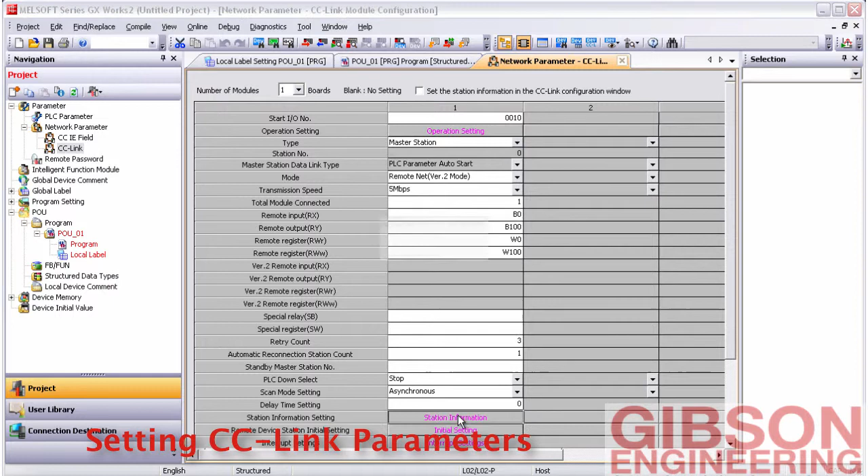Station information is the next thing you need to set. We do not, so where we chose one module over here, it only shows one. If we had chosen multiples, you'd see multiple here. So it shows module 1 and then station 1. If we had 2, it would show module 2, station 2.

However, we're going to go and choose remote device station. We're going to say it occupies 2 stations, which is 64 points. So now, once you do that, if you did have 2 or more axes, you'd see it skip a station number. So for module 1, it'd be station 1. Module 2 would be station 3. Module 3 would be station 5, etc.

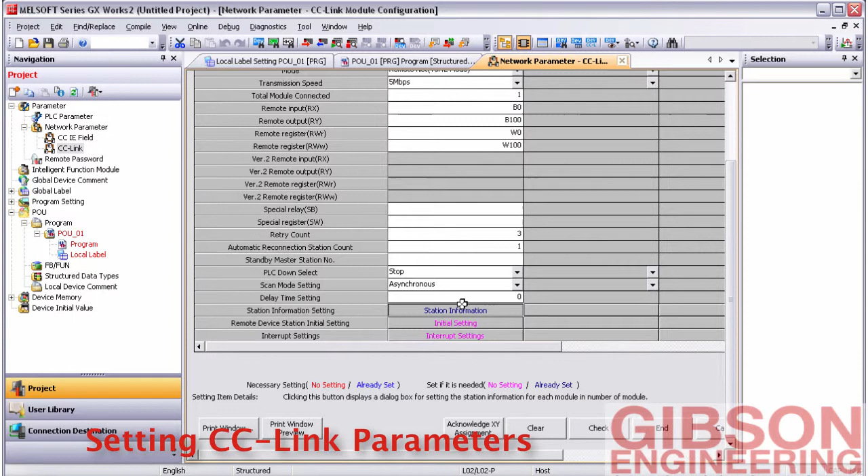Now this is all we need to set here, but make sure you click End. And again, on these CC-Link parameters, you want to hit End. So that's the communication setup.

Next, what we're going to do is import a library. So Gibson Engineering has developed a library which includes a function block and the corresponding labels specifically for the L series to talk to a PCON type controller.

So we're going to go to our user library. See, we've got nothing in there yet. We're going to install it. I'm going to browse for it on our local PC. It goes right to the folder I have it in, and choose that CC-Link PCON library. Hit OK, let's install the library, and now you see the library in our user library tab.

Everything's grayed out now, so what we do is we right click, we hit open, now you can see everything. Labels, any functions or function blocks you have, and any structured data types that were set up as well.

Now we do need to bring over our label data. So we're going to take Axis and Logic, highlight them, copy, and we're going to go back to our project, go to our global labels, paste it right in.

Now, our project can't share the same data names as our library. So we're going to change this to Axis 1. Logic, we can just change to logic bit, because that, you'll see later, can be used for multiple axes. Hit OK. So now we've got Axis 1 and logic bit under our global label data. This global 1, which was in there by default, we can get rid of it if we want and delete that.

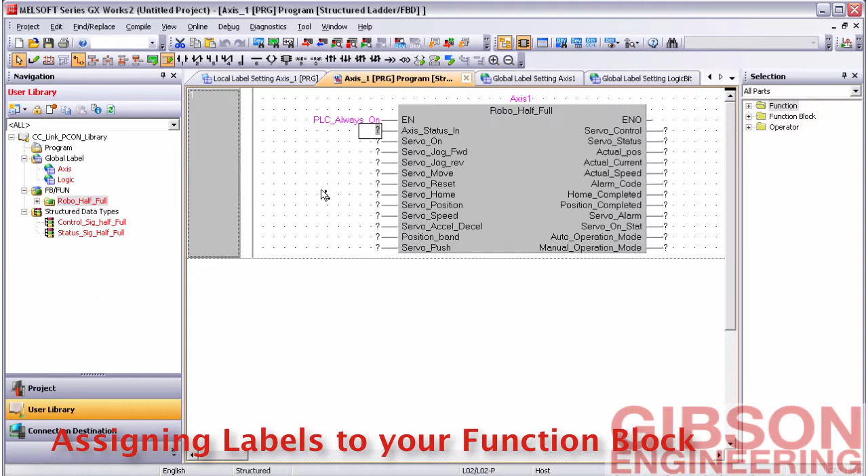So now the next one is axis status in. This is not in the logic bits, this is in axis 1, and it is a structured data type. So I'm going to choose axis 1 status, hit apply.

Now we just got to go down the list. We're back to simple data types, and this is just servo on, call it axis 1 on. Jog forward, reverse, start move, reset input, assign the home.

Servo position, and you can see this looks a little different. It knows based on the function block that we need a double word here, so we've got our position label. Servo speed, accel, decel. Again, it knows the data type, so it's only going to show the ones that are relevant.

Position band. Now in this library I happen to know we're going to choose position band, but I happen to know that it's set as a constant, and the servo push was not actually defined. Go back and look at our labels. There's no push in there, and you can see again position band was set as a constant.

So again, if I go back to our program, servo push we don't need to use, so I'm going to cut that question mark right out. Now on the output side, we're not going to create any additional programs other than just using this function block or any additional programming. So we don't necessarily need labels assigned to all these, but we can leave question marks.

The control one we do need to assign that structured data type. Double click on that, command, apply. Now the rest of these I can just go ahead and get rid of. You could assign labels — there are labels defined in that library — and that's all we need.

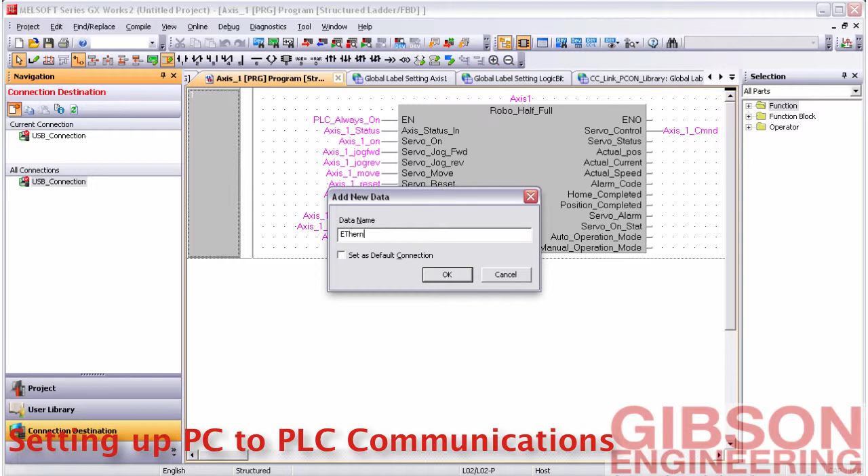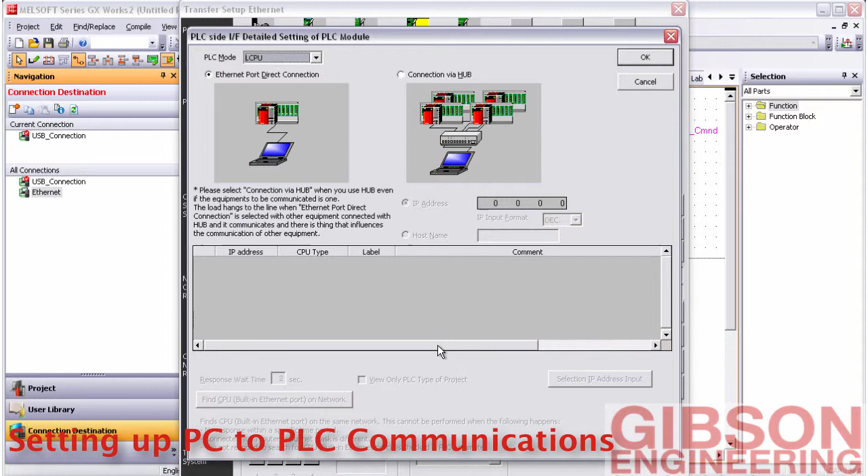If I want to add a new connection, say I want this to be my Ethernet. Hit OK, double click on that to set it up, and I can do the same thing. I don't have a hub, so I'm going to do PLC direct coupled connection Ethernet. Hit yes. Now if I look at my settings, nothing there — PLC module, you can see Ethernet port direct connection. So if you had a hub, you could check this box and assign the IP address, or find the CPU's IP address and use it. Do a connection test now — successfully connected. So you can see we can jump back and forth between connections. Current connection is USB; I can drag Ethernet up there and connect with that, or go back to USB.

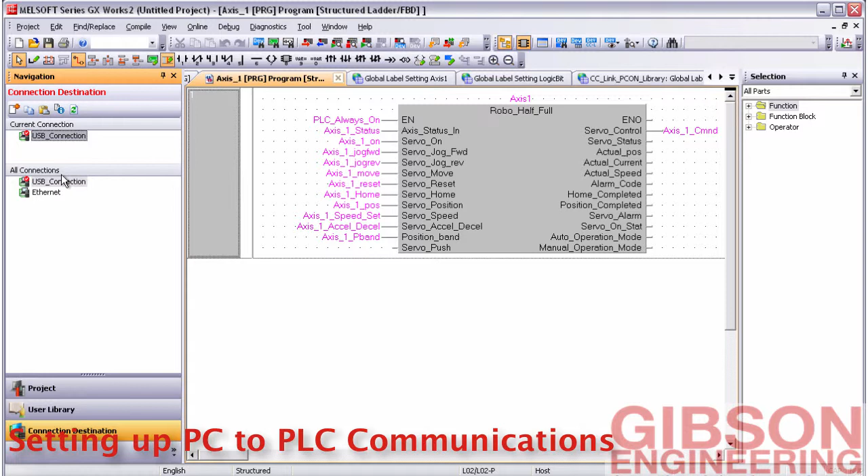Now that those are set up, we can download a program. First what we want to do is rebuild all. Yes, no errors. Online, write to the PLC. One thing to point out here: in our case the symbolic information isn't particularly big, but symbolic information can get to be a memory hog, so it's good practice to turn that to standard ROM — PLC data can go into the program memory.

Now I'm just going to download parameters and programs. Execute. Yes. I can overwrite the parameters. Check this button so it closes when it's done, do a remote run, and it's all complete. Close this window. So now I can go online and start monitoring.

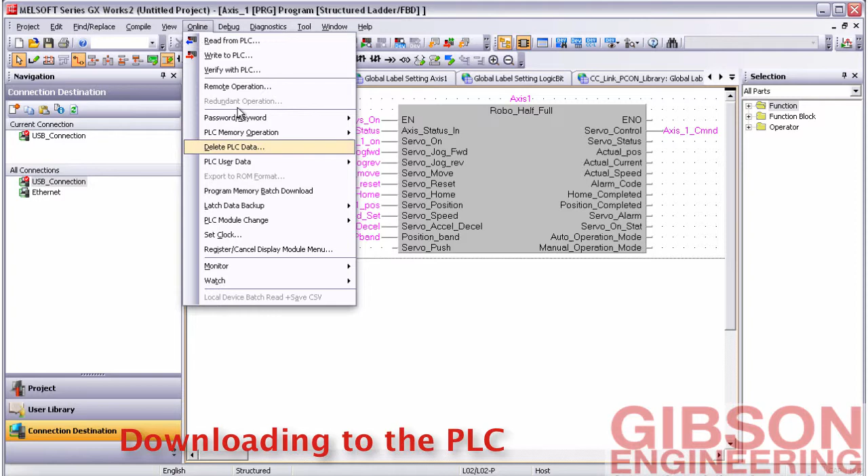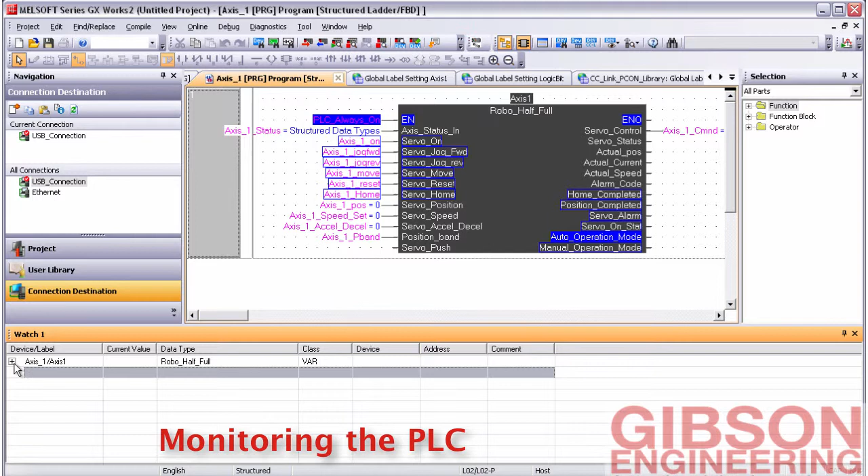You can see I'm now monitoring, so the always-on bit is on, nothing else is set yet. Another way to see that is I can create a watch window. A nice feature is I can right click right on this function block and register to watch. It now creates a watch list for this function block, which includes everything connected to it. See, there's just dots, not being watched yet. If I go online, watch, start watching, go back and look — they've all been populated.

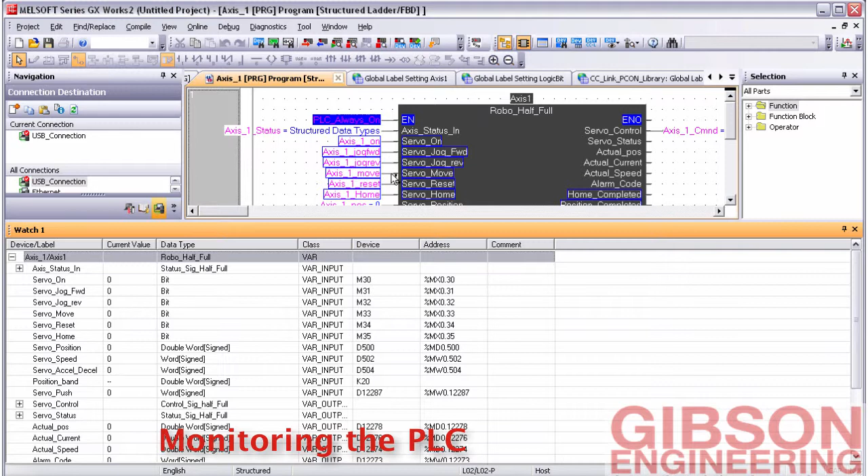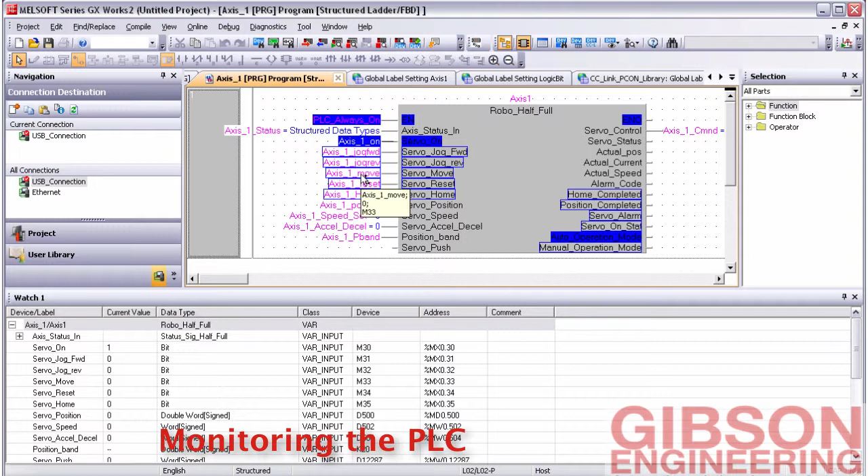So now if I go ahead and look at the function block, double click on servo on, say turn it on — it's turned on now, you can see the bit there. Our servo is on; we could start turning bits to jog, home, start a move if we had put in a position. But we've also created a soft GOT program that we can use as user input.

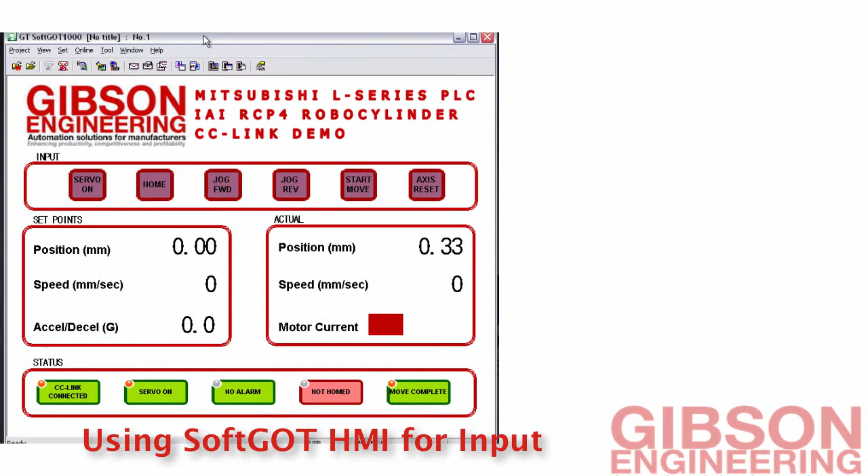So now we've got our soft GOT. You can see our servo is already on because we had turned that on through the PLC software. Now we can home it, we can jog, we can also go in and set positions — 100 millimeters, set a speed of 200 millimeters per second, set an accel and decel value to 0.3G. Now we can do a start move, move to our 100 point. Go back in, change that to 0, and go right back.

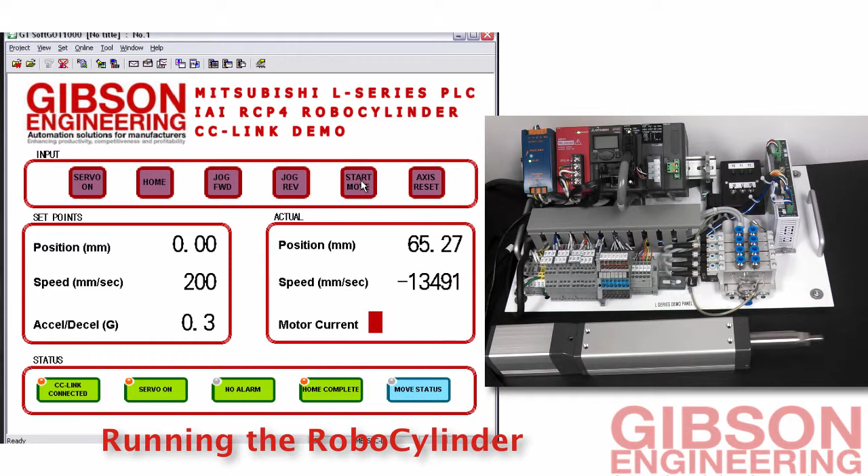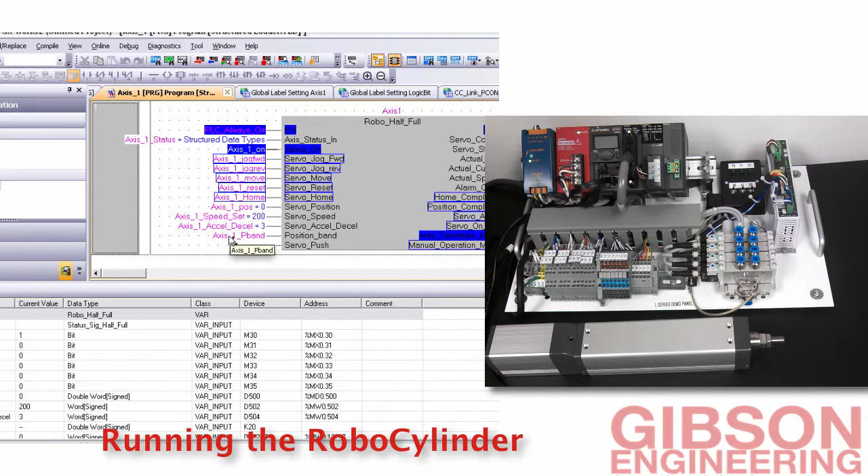Now we can also do that with GX Works2, so if we go in and set a position — you can see we've exposed all the basic functionality of the RoboCylinder over CC-Link, like jog forward, jog reverse, home, and position moves. So now you can use those labels we created within your program to create whatever kind of functionality you need. If you have more questions, please reference our QuickStart guide or contact Gibson Engineering.